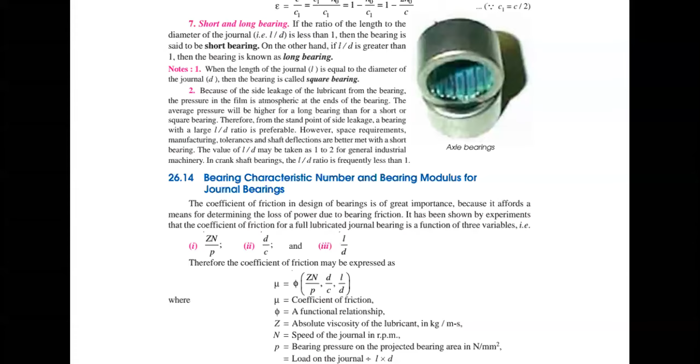But before that, commonly I am explaining today's topic, without wasting time, because already we lost 15 to 17 minutes. So this is a very important term we are using in case of bearings.

So the terms we are using here are bearing characteristics number and bearing modulus. These are two important terms for reducing the friction of your bearing. The main purpose of a bearing is to reduce friction and to avoid wear and tear and any dimensional changes. That is the reason why we use this bearing.

Now here we are using some important terms. What are those important terms? Just simply observe. The first term is Zn by P, second one is D by C, and third one is L by D. What are these parameters?

Here Z is the absolute viscosity of the lubricant in kg per meter second. Please remember the unit, that is very important especially in design. Almost all the data is available in the data book, no need to worry. But in some textbooks the units are different. Whatever the units, you have to follow these units easily, that is very important.

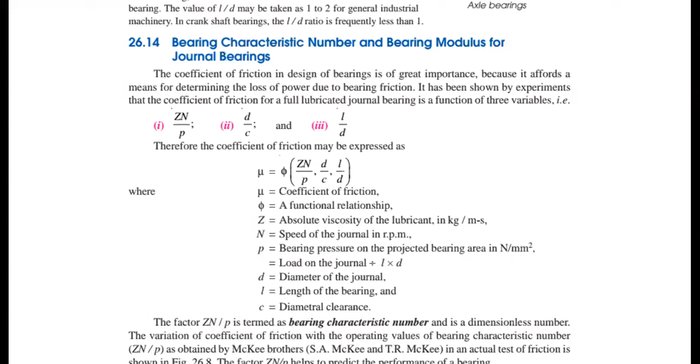It plays a very important role. Zn by P is called as the bearing characteristics number. This is a very important question and a very important term also. Now we have to move on to some important graph or observation. Please observe.

Here is one important graph, let me share the screen. This graph is called the McKee investigation. McKee is a scientist name, and McKee's are brother scientists.

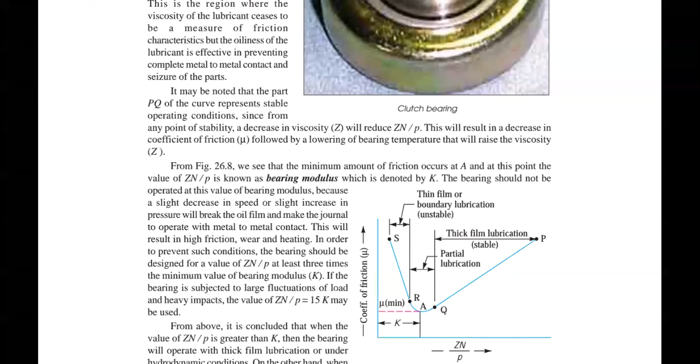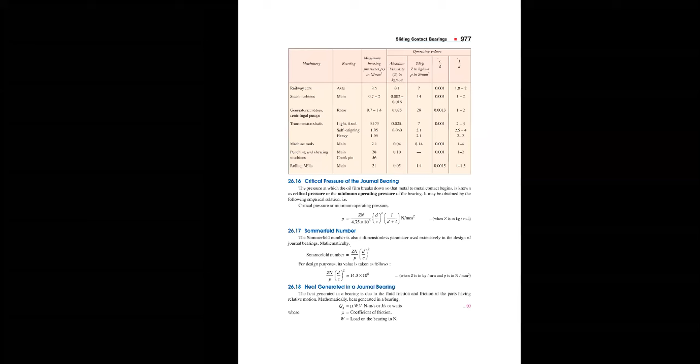McKee's brothers investigated these important parameters, and based on those observations he used to draw a graph. Here on the x-axis is the bearing characteristics number, and on the y-axis you are having the coefficient of friction.

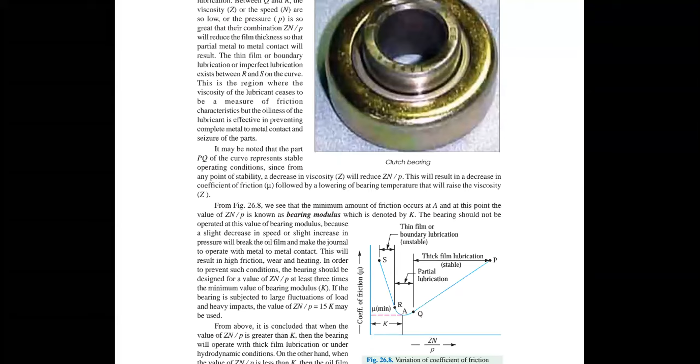This is a very important point, please pay attention, because this is a 7 marks or 5 marks question, whatever the weightage. This is called the McKee investigation, McKee being the scientist name. Here it is Zn by P on the x-axis and coefficient of friction on the y-axis.

Now please observe that you are having points P, Q, R or S in the graph. You can call it a graph or variation with respect to coefficient of friction and Zn by P. So P, Q, R, S, and in between you have point A. In the line from P to Q you have thick film lubrication, at A you have partial lubrication, and from R to S you have thin film or boundary lubrication. What does all this mean? That is very important.

What does all this mean? Simple explanation: our main intention is, by taking the value of Z, N, and P, since these are the important parameters—viscosity, speed, and bearing pressure—you have to maintain minimum friction. That is our aim in designing a bearing. These are the main parameters.

Now, at what particular point in time do you have minimum friction? That is the basic intention. Is there any possibility of avoiding friction? All these things are to be observed in this particular graph or investigation.

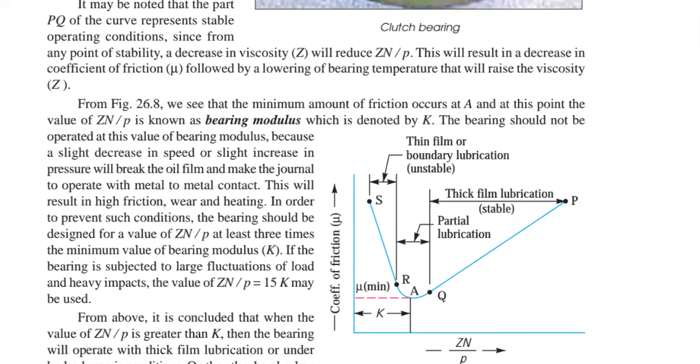Whatever the value you consider, you can take Zn by P value equal to K, meaning 3 times K, 4 times K, or 10 times of K value, right? So this is the actual graph of McKee's investigation. Now, PQ is having thick film lubrication, and RS is called thin film lubrication. Why you are having these 2 things means...

Already I told you that whenever two metals are not in contact, you automatically have thick film lubrication. In the last class I already explained this. Whenever you have thin film lubrication, at one particular point of time you have metal to metal contact. Definitely there is possibility of contact at that point of time. That is the reason why it is called unstable, while thick film lubrication is called stable.

So metal to metal contact is possible in thin film lubrication. It is also called boundary lubrication. So this is the actual graph. I hope you understand this point, very, very important.

By drawing this graph, you have to explain all these terminologies. Now directly we have to move to the actual design procedure of your bearing. We already explained lubrication and the basic terminology of sliding contact bearing, and another important thing, variation of coefficient of friction with respect to ZN by P. The last one is design. Then directly we can design your sliding contact bearing after knowing the design procedure.

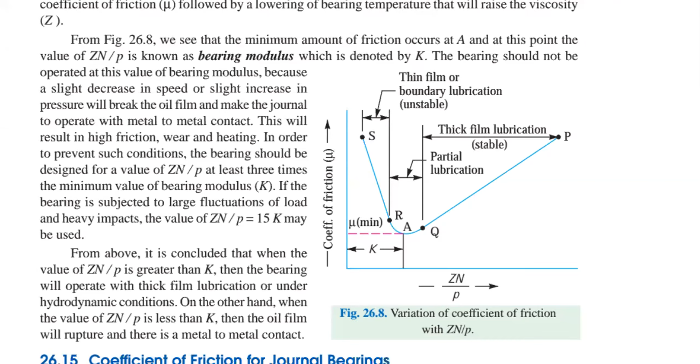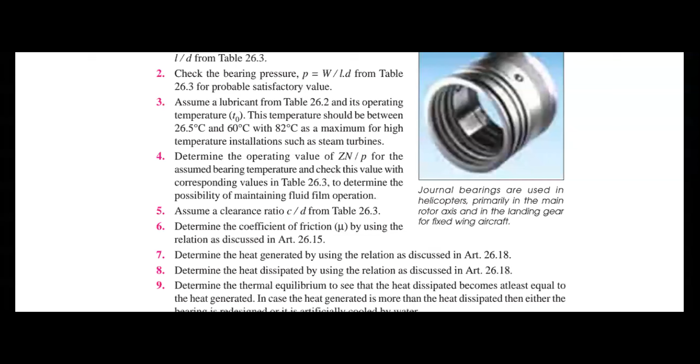So we can explain these terminologies also, what is Sommerfeld number and all those things. First, understand the design procedure of your bearing. Okay, still we are having more time, no problem.

So the first step is in a sliding contact bearing. I hope you all see this, number of steps 1 to 9. This is the basic design procedure of sliding contact bearing, and you have to follow one by one each and every step while you are solving the problems, especially. This is very, very important.

First and foremost thing is determine the bearing length by choosing a ratio of L by D. This is very, very important. And already we defined the terminology of long bearing, short bearing, and square bearing. Wherever the L by D ratio value is more, you have a long bearing, and less, you have a short bearing. When the length to diameter ratio is equal to 1, you have a square bearing.

So you can choose whatever type of bearing according to your application. This is purely based on application. In a given problem, they specifically mention the application, and according to that only you choose the L by D ratio. All these things are available in your data book, no need to worry. The first and foremost thing is taking the ratio of L by D, length to diameter ratio.

Next, second important point is you can check the bearing pressure. That is also another important point. Already we discussed this in McKee investigation also, bearing pressure. How do you calculate the bearing pressure? Means load to your area. So this is very, very important. How much amount of load is to be acted, and according to that, what pressure is going to be exerted. This is also another important point.

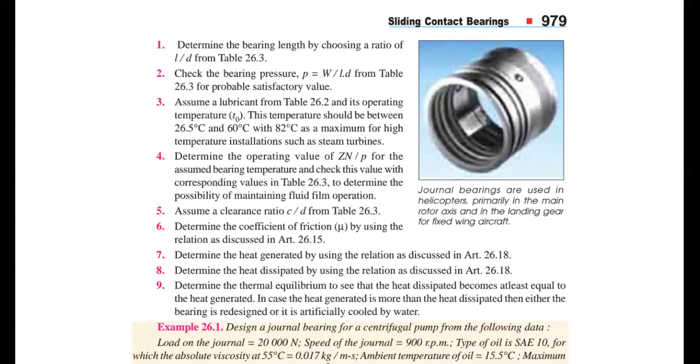Some of the students are entering with their names. Please enter with your register number and don't provide any spaces, especially number 18 series entries. Last time I already told you, please don't give any spaces. Please simply type your register number like 301, 302, then only we can make attendance easily. Some students are entering with their names - at least for the next class, please enter with your register number without any spaces. It is mandatory, otherwise we have to mark those students absent.

For those students, I am repeating this point many times, keep on saying this point. So please register with your register number and don't put any spaces.